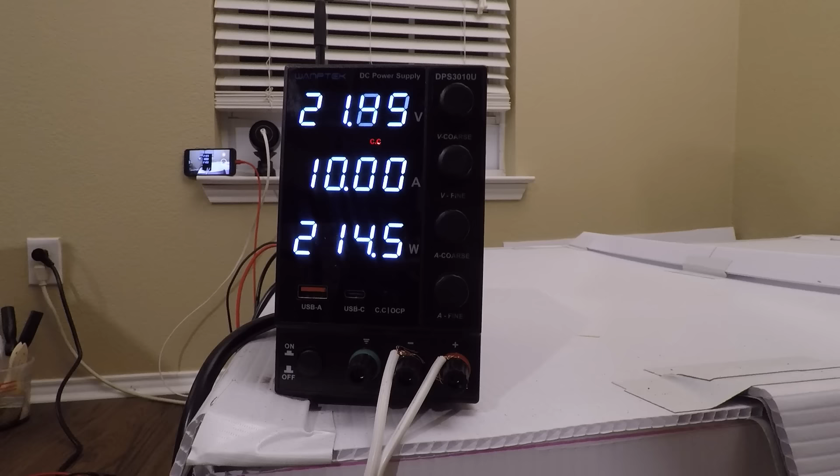So here's the little hot wire I threw together, just to be able to cut this thing out without making too huge of a mess. It actually worked pretty well, not perfect. And then we have the main profile of the board cut out.

Here I'm starting to mix some fiberglass with some glass spheres and a little bit of black dye. I'm going to do an initial coat of epoxy over the board to fill in the areas that got melted during the hot wire cutting.

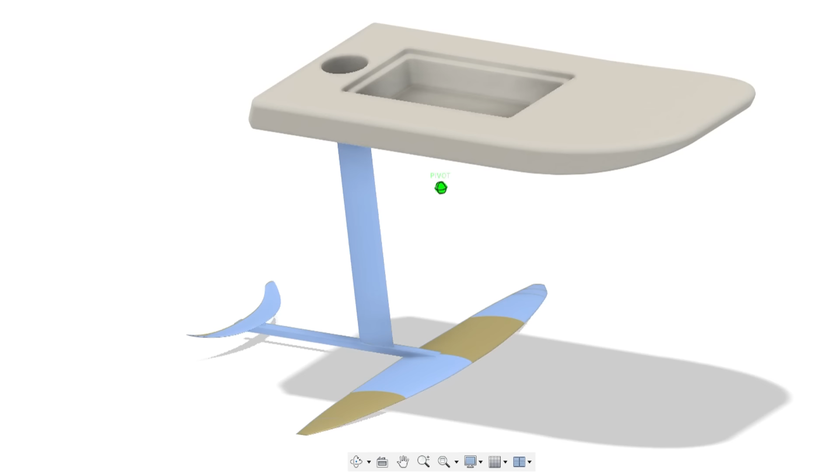As we're prepping here for the angled cuts on the side of the board, I'm starting to saw cut the sides off to get the final profile of everything. More sanding and shaping to try to get the board into final shape.

We're routing out the opening for the rear electronics compartment where the wiring and everything will come up out of the mast. We're doing the same thing for the front hatch, which is going to be a storage area for your phone, keys, whatever you've got on you on the lake.

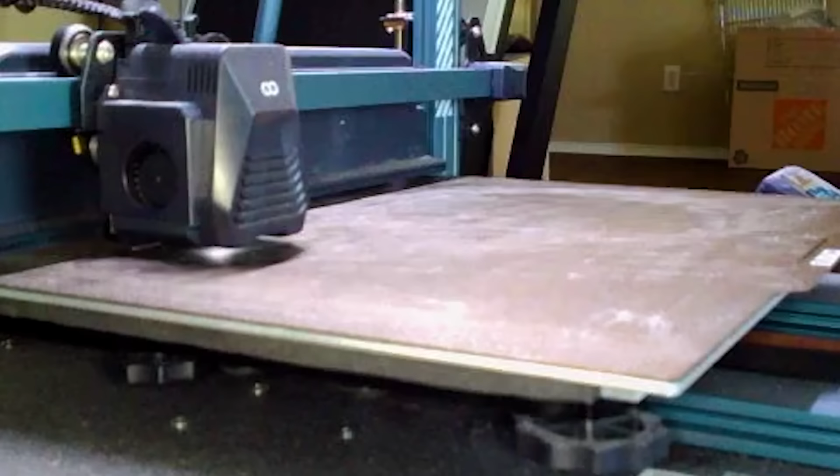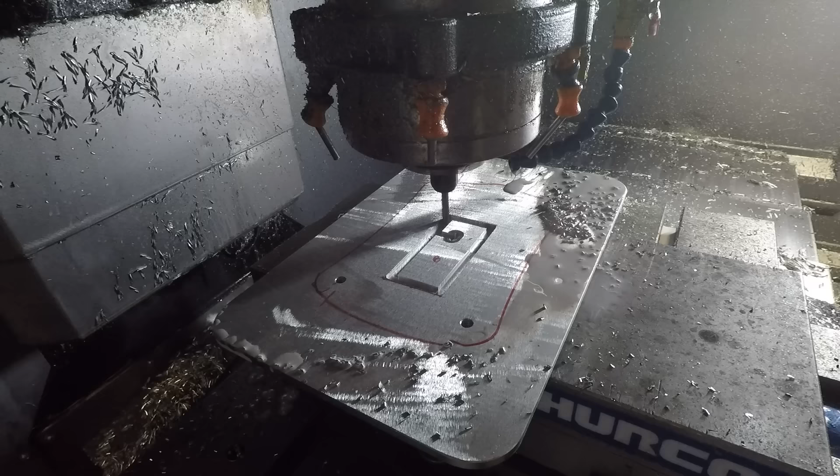There's a 3D printed template to route out the pocket for the metal mast plate I created earlier. The 3D scan I took of the mast top plate lined up here when I was designing everything, where all the holes go to seat down into the foam. That seats in there pretty nicely.

It cuts all the way through the board into the compartment we cut earlier. Here we're starting to route out the main electronics compartment—there was a lot of foam that needed to be cut out for this. The router made decent work of it, but it was a huge mess.

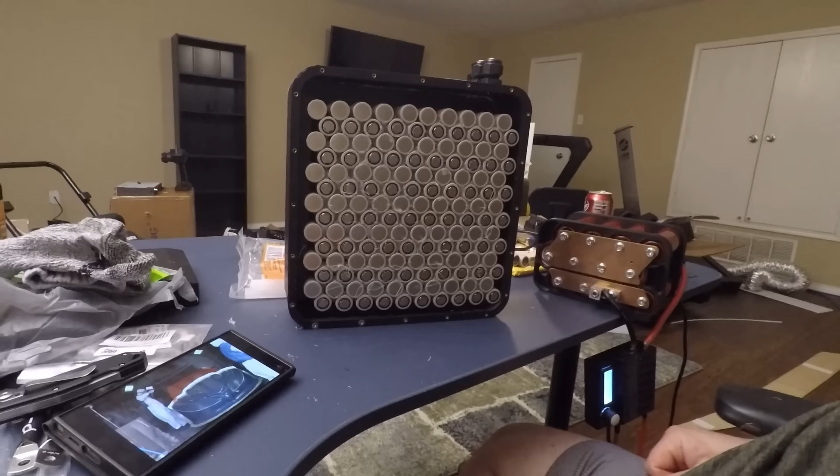There's the board all roughed out. So this is the 3D printed shell for the battery itself. This battery is built with the Molicel P42A cells.

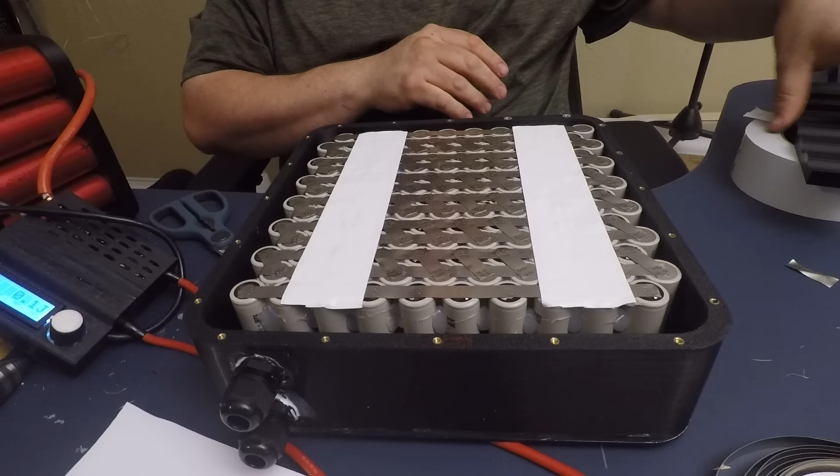There's a 14S 10P battery pack welded with a K-weld setup. I'm doing a first test fit of the battery to make sure everything is fitting in the 3D printed shell properly, and getting the balance leads soldered on from the BMS.

And here is the last test fit of the fully assembled battery module going into the case. It fights me a little bit.

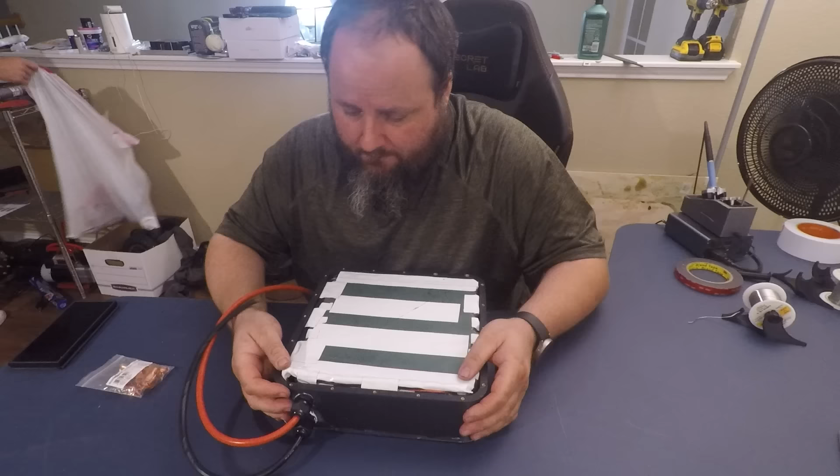So these are some brass inserts that are melted into the plastic part to give us metal threads for clamping the top and bottom shell of the battery case on.

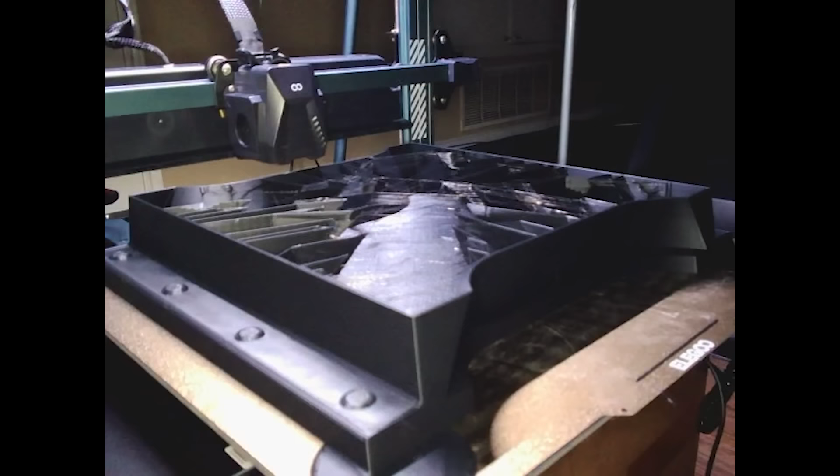This is the negative for our main electronics enclosure fiberglass part. After this is printed, fiberglass is applied directly to this part. These are the threaded inserts that'll be embedded into the fiberglass electronics enclosure to allow the lid to be screwed on later.

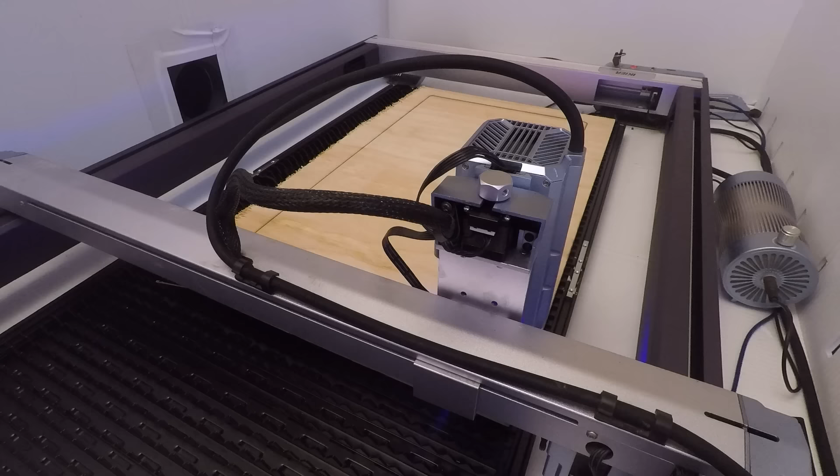Here's my laser cutter set up. I'm cutting a piece of plywood to be the top piece of the electronics enclosure fiberglass mold.

You can see we're starting to get the fiberglass ready and get that mold created—lots of layers of fiberglass. I'm trying to do a vacuum bag to make it all nice and compact.

So here's the fiberglass electronics compartment, test fitting that, and everything seats down in there—room for the battery, speed controller, and here are our hatches for the front and back.

And that's the rough idea.

This is mixing up a bunch of extra thick epoxy with fumed silica so we can glue in the storage compartment that I 3D printed for the front of the board, making sure that doesn't go anywhere with your phone in it. We're doing the same thing with the metal mast attachment plate on the back, getting that all buttered up with thickened epoxy, smashing it down into place, and feathering it out a little bit so the transitions aren't too rough.

I've glued in the electronics compartment with some Great Stuff expanding foam. Unfortunately, there was nowhere for it to vent out, and this ended up splitting the side of the board and bulging out the bottom, making an enormous mess trying to recover from this. So this is our repair, gluing in more foam to fix the sections that were damaged from the expanding foam.

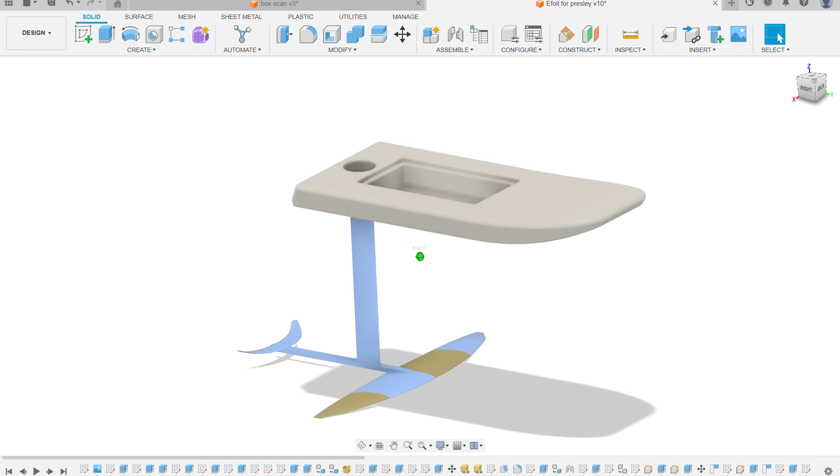We found an off-the-shelf foil and mast combination. My design for the motor mount is also largely based on what I've seen other people do on Foil Zone. This front plate I cut out on a CNC mill, with an opening here for the water coming in through the nose cone and then into the mast to cool the speed controller.

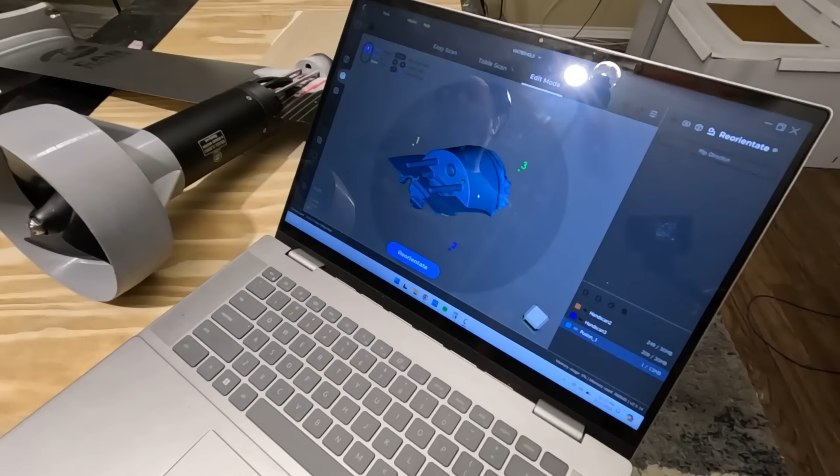Here I'm 3D scanning the mast and motor mount. We're using this scan to make an adapter to take the water coming through the nose cone, through the motor mount, and send it into the opening in the side of the mast to go up to the electronics, into the speed controller to keep it cool, and out an exhaust port in the bottom of the board.

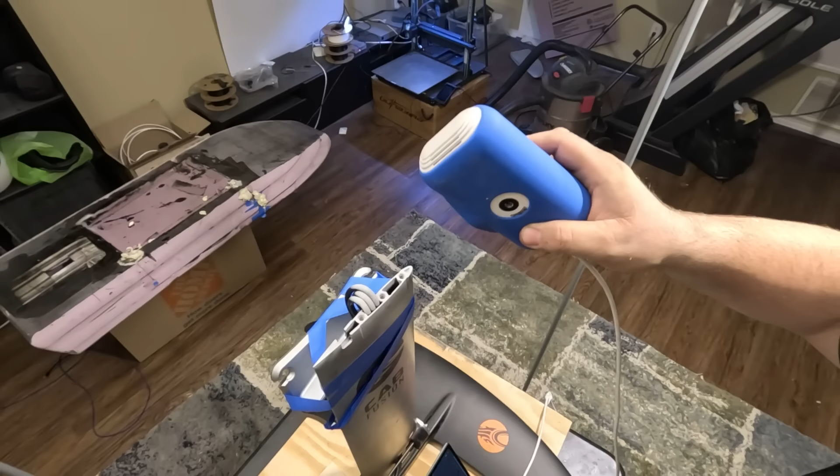Doing the same 3D scanning to the top of the mast to make that irregular shape fit the 10mm diameter hose going into the speed controller, and threading all of our cooling and power connections up through the mast adapter.

This is a 3D printed TPU gasket we were trying to make work that ended up eventually getting replaced by rubber. I'm doing a first test fit with the mast to see how everything looks put together.

Getting it all bolted down nice and tight, and here I'm testing it with a spare 72 volt e-bike battery to make sure everything's functioning properly.

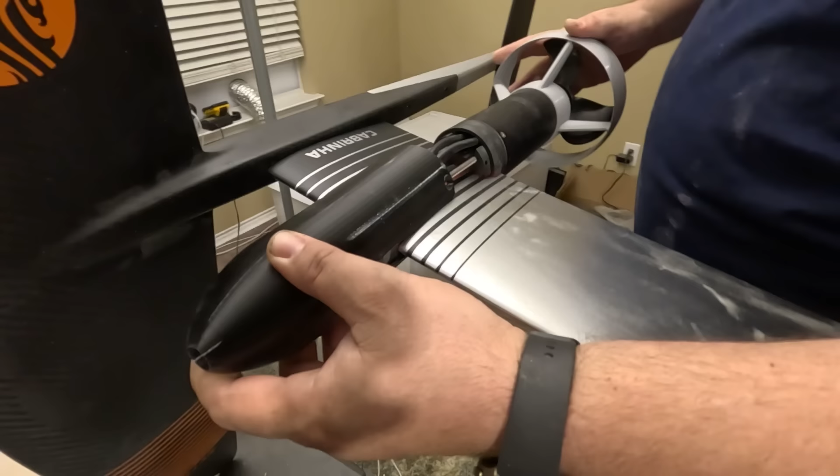Test fitting the nose cone, seeing how everything fits together. You can see the cooling inlet port on the front of the nose cone.

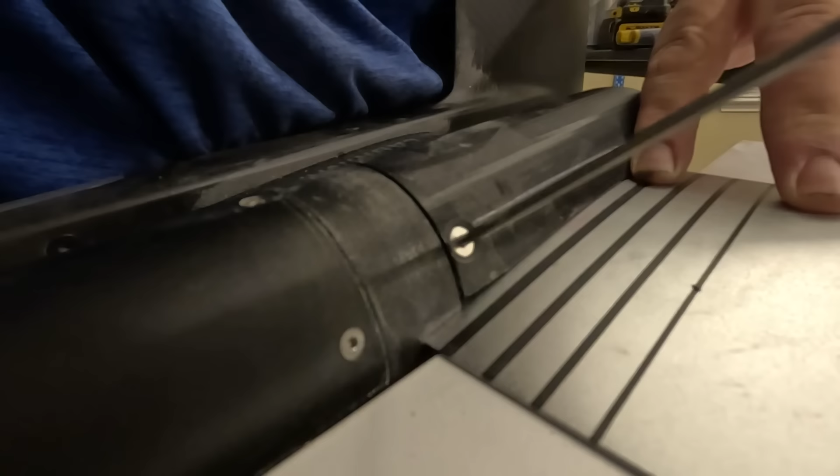Here I'm installing the heat set inserts into the motor mount. These will be used to hold the nose cone onto the board, so we can have a nice strong metal thread in a plastic part.

Getting another piece of wood into the laser cutter. This is going to be the actual electronics compartment lid, and this will be covered in epoxy to waterproof it as well.

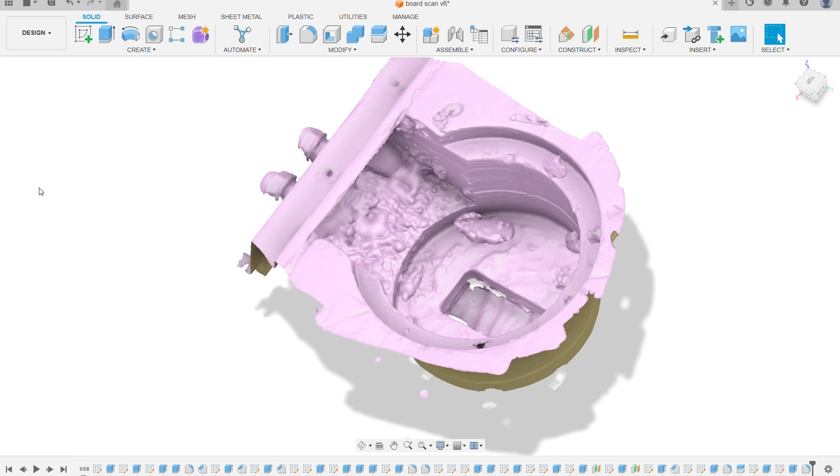So I 3D scanned the foam cutout for the rear electronics enclosure after everything had been put together, so I could design the insert to fit nicely - our phase wire connections, our charger port, our power button, and our cooling water connection going into the battery compartment.

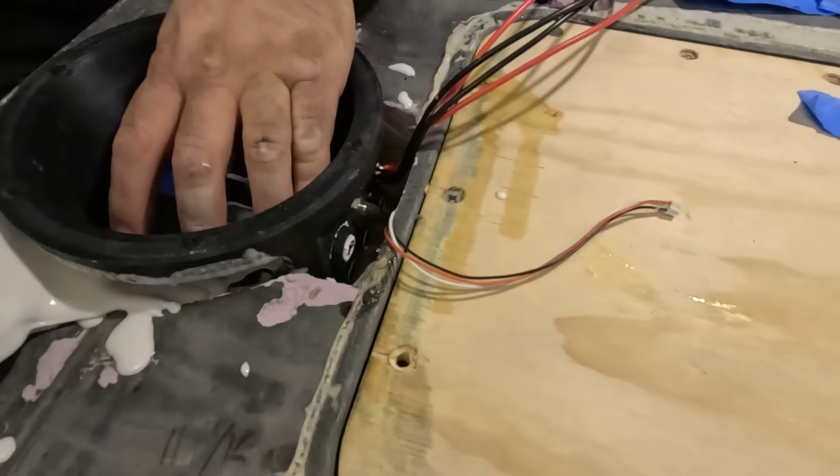Assembling the rear electronics compartment. This is a 3D printed part that the hatch will be screwed onto after the fiberglass, and this is more of the thickened epoxy I'm using to glue everything together.

Starting to get all the wiring run from the rear electronics compartment into the main electronics compartment. These are the charging wires.

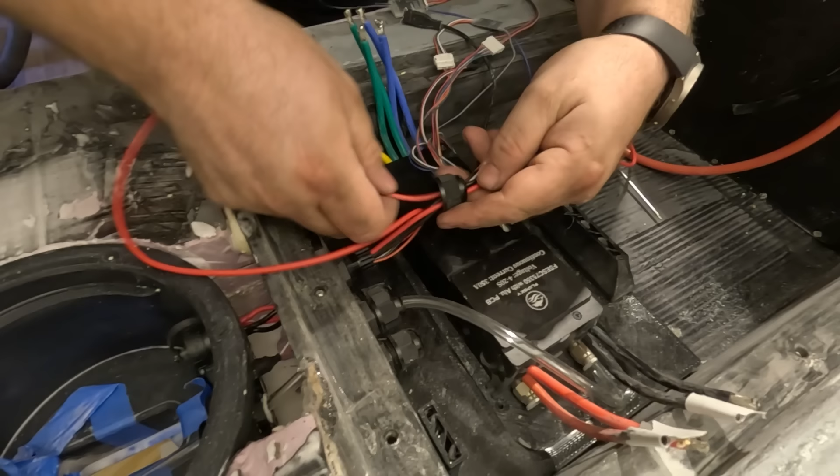Soldering all the jumpers for the phase wire connections, getting those all ready to go to be installed into the board.

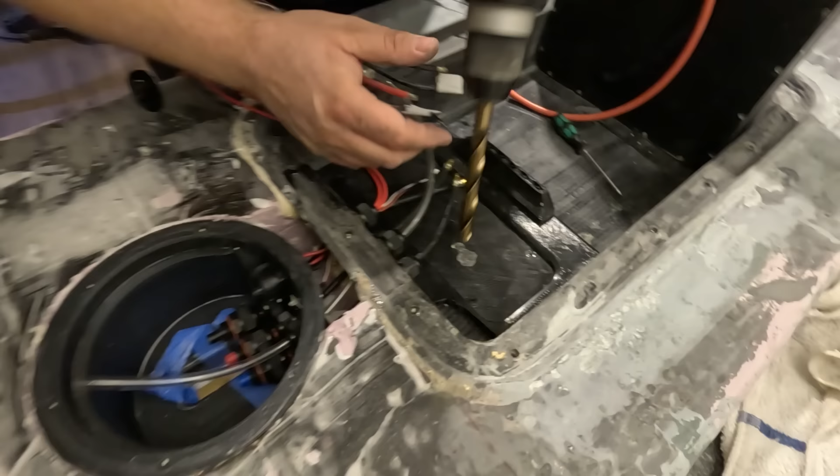Here I'm drilling the drain for the water that comes out of the speed controller. It will drain through this port at the bottom of the board.

Doing some more body work to fill in gaps and make everything a bit smoother before dealing with any fiberglass. We're doing even more Bondo to try and finish that repair on the bottom and just finish overall smoothing up the damage to the board.

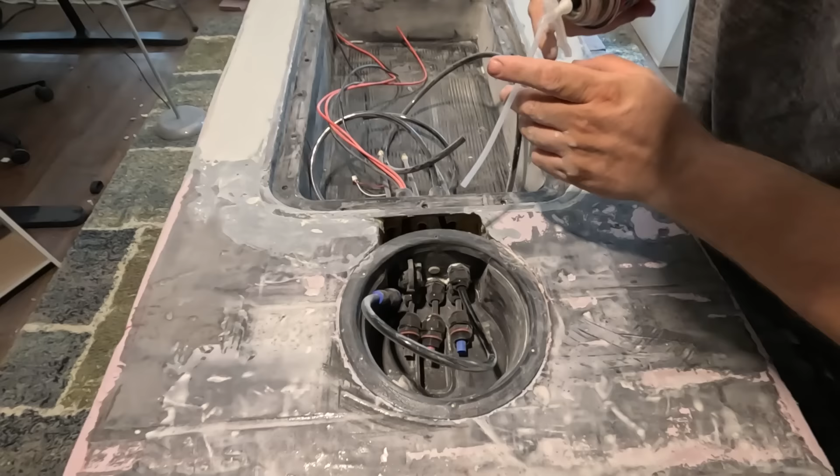So we're filling this gap in between the two compartments with Great Stuff to allow that to be sealed. Doing some last touch-ups with some Bondo.

At this point we're preparing to start fiberglassing the board itself. I'm doing 3 layers of 6-ounce e-glass on the bottom and top of the board. We had scrap carbon fiber from another project, so we went ahead and put a little reinforcement patch right at the nose.

Here we're doing the top coat of resin, tinted black, to start getting the final color of the board. Doing the same thing as on the bottom, 3 layers of 6-ounce e-glass. We tinted the resin for all 3 layers on this one just to make it nice and dark colored.

Doing just a rough sand of the fiberglass, to get everything nice and smoothed out, and the transition blended pretty well.

So here we're starting to epoxy our lid to make it nice and watertight. And here is the flood coat for the bottom of the board. Make it look nice and good, or at least not too bad.

Never done anything like this before, but I think it came out all right, as long as you're far enough away. The last flood coat of resin on the top of the board, to make it nice and shiny.

Same thing for the electronics compartment hatch. Just gotta let it cure.

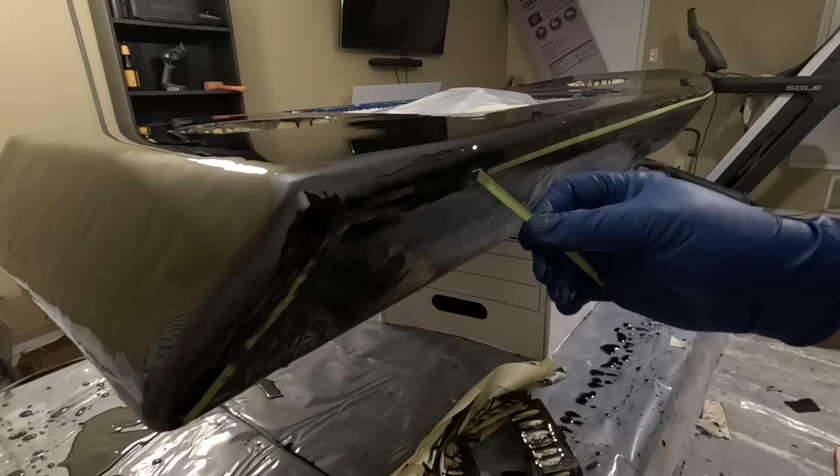Before the top coat of resin fully cures, peeling off our masking tape to try and let that blend into each other a little bit better, hopefully reducing the seam that's left over.

We're doing the same thing inside of our front hatch, same thing for our rear electronics enclosure, and finally the main electronics enclosure. Gonna get all the masking peeled off of that.

We're prepping to do a pour-in 2-part silicone gasket for part of the seal between the hatch lid and the board itself.

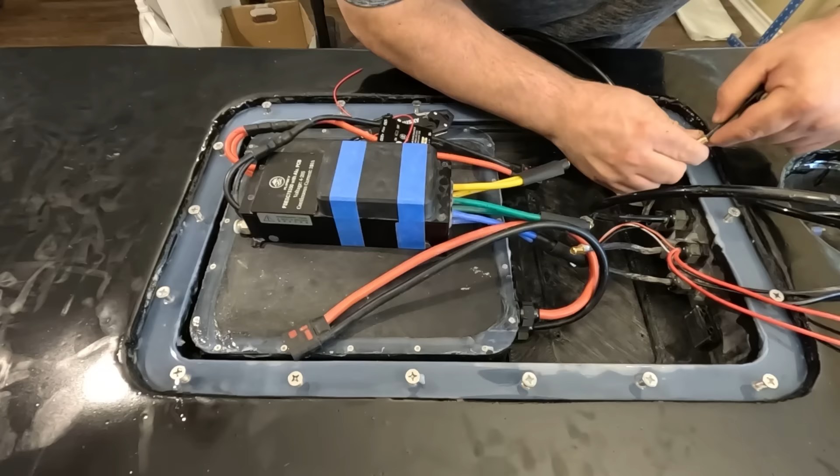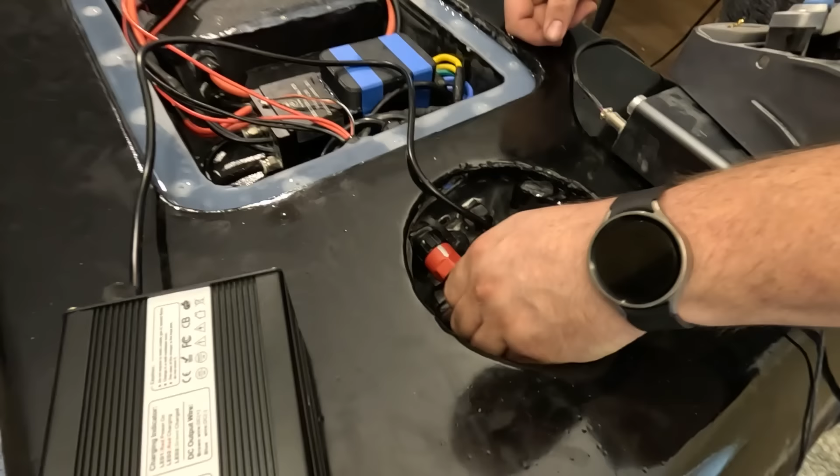We're starting to do final assembly here, getting the phase wire connections for the ESC to the mast, and connecting the charging wires that are coming from the rear electronics enclosure to the plug that connects into the battery to allow everything to charge nicely.

Ended up going a little overboard with the silicone on the battery case itself, just to be certain if water does ever get in there, nothing will get into the battery itself.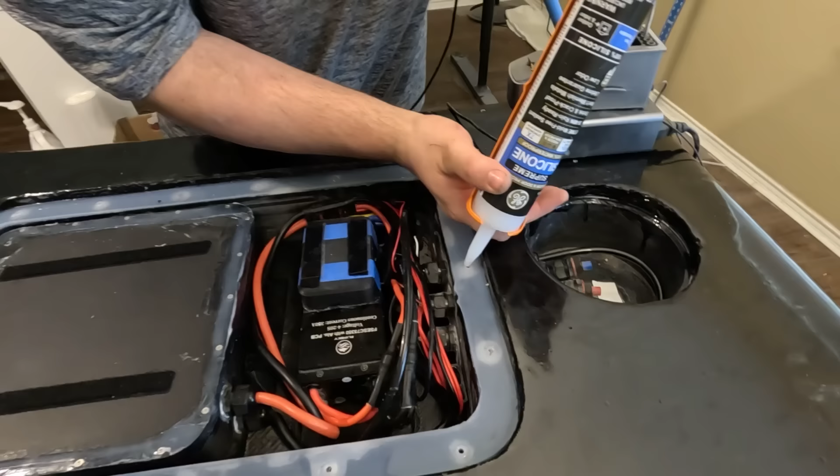Making sure there's plenty of silicone down inside all the screw holes. Definitely going overboard, but I'm going to be 100% sure there are no leaks ever.

Make sure all of our settings are correct. We're sealing on the electronics enclosure lid with all this silicone to make sure everything is watertight. It is meant to not have to come off ever unless there's a big problem.

The front and rear hatches also get lots of silicone, because you can't be too careful. We're opening up the holes on the bottom for the mast mounting holes.

And we're applying the foam grip tape to the top of the board, trimming the foam around the hatches so those can be installed with that piece of foam on top.

I'm doing a little freehand trimming here to make the nose, give it a little shape, make it look a little better. And here for the first time is the completely finished board.

I'm showing our front storage compartment, all the random junk you can toss in there.

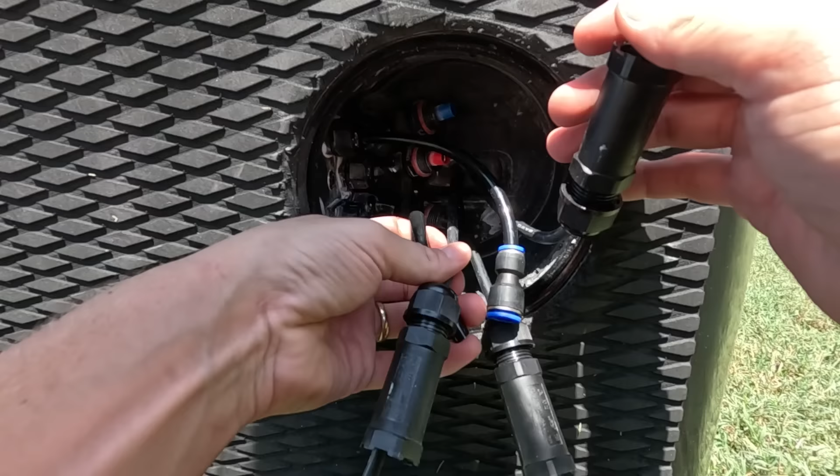We set up a pool in the backyard here to get this thing fully assembled and test submerge it, trying to find out if we have water coming in anywhere before we get it out and have something fail on us.

And here we are at the lake, getting this thing put together for the first time, ready to get out on the water. In it goes.

It is a little heavy. First test drive around, laying on the board. Everything seems to be functioning so far.

That's when we were reminded that I am not good at this. So I took a week to work on it.

Not that I can do anything special on it, but it all feels pretty special.